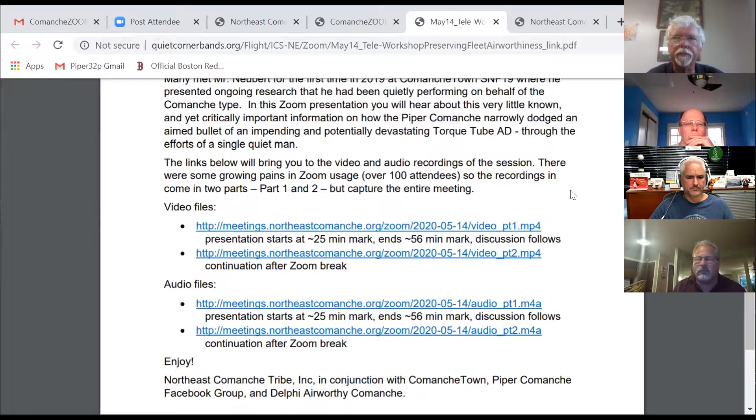Wow, that's impressive. Whoops, no, I just blew it away, didn't I? I'm sorry about that. Again, can you still see it? No, okay, I have to go back and share it, okay.

The idea here that Pete has so clearly put together is everything shows you from the Comanche Zoom on how to get to the audio and the video.

And as it turns out on that last one, there were 2 parts, so listen to part 1 before part 2. What happened is the recording got fragmented in the middle, so we just continued recording it, and the parts are named separately. Don't think that they are duplicates of each other. Part 1 comes first, followed by a shorter part 2. It was internet interruptus.

Looking ahead, aircraft insurance is next week with Lycoming. That was supposed to be this week, we thought, and we were able to move Steve up to fill his spot.

New life for old autopilot. He's going to talk about the original ones that were in the Comanches, the old style ones. Rob Leonard was with the FSDO here in Connecticut and is a wings guy.

And then here's the 3 on autopilots. These guys are coming back after having done a massive group thing back in the earlier time with the autopilots. Then part 43, maintenance, how to do it and how to log it. And speed mods, in case you want to do something short of putting a 325 horsepower engine into your 180.

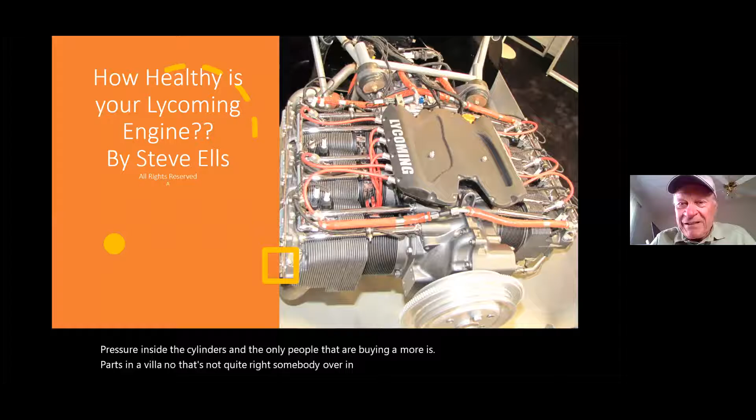So what you see in this picture is the Lycoming IE2 engine, which is a fully automatic engine waiting for somebody to buy it and put it on the airplane. It automatically adjusts the mixture, automatically adjusts the timing for best angle of pressure inside the cylinders, and the only people buying them is Partenavia. No, that's not quite right, somebody over in Europe. Anyway, this engine would be what we could all put in our airplane if there was no lead, because lead goofs up all the sensors in these engines. So someday we'll get there.

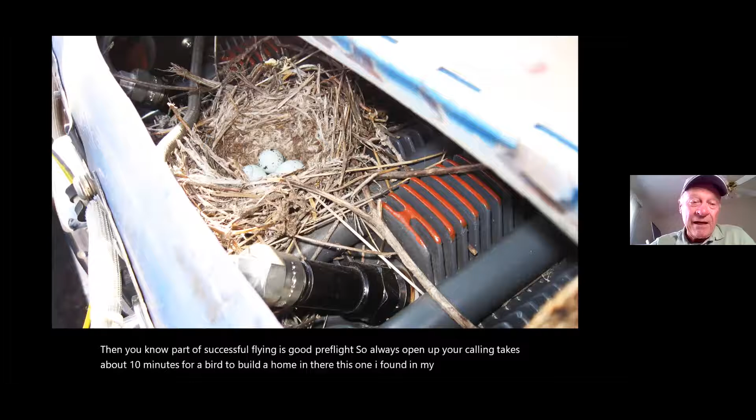Okay, this is what mechanics run into once in a while. Part of successful flying is good pre-flight, so always open up your cowling. It takes about 10 minutes for a bird to build a home in there. This one I found in the cowling of my 180 one day. I had an open hangar, so that made it easy for Mr. Bird to settle in and build a family.

This is a typical, this is the old exhaust I had on my airplane. I believe it was original, so it was 50 years old. You can see that it's been repaired before, sort of somebody stuck a gob of weld on it down here, and it cracked again. So this is the evidence that it's cracked.

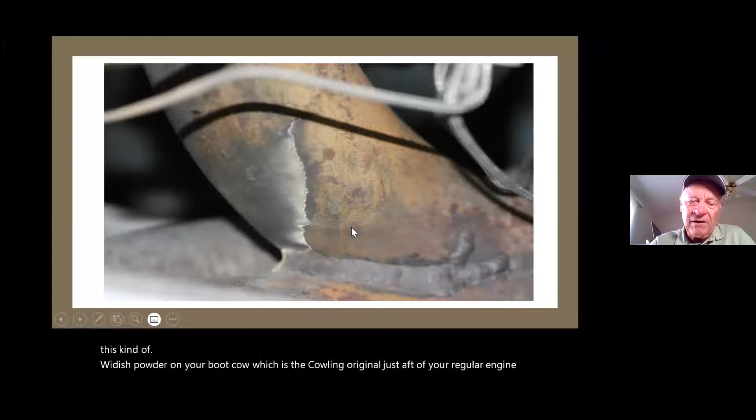You always want to be looking out for this kind of whitish powder on your boot cowl, the cowling just aft of your regular engine cowling, because it'll seep out there and it'll stain, and it's talking to you. So make sure you're listening.

Okay, how do we keep the engines healthy? Do what it takes to keep the CHTs under 400 degrees Fahrenheit. It's okay sometimes during an extended climb on a hot day to let it creep up above 400, but you should try to do your best to keep it under 400. The tools you can use are reduce your climb angle, reduce your power if able, or enrich the mixture. Sometimes you're not able to reduce power, you're climbing out, you've got a load, and you need all the rich you've got to keep the engine cool.

So sometimes it's going to go above 400, but if you have control of it, in cruise you should be much cooler than 400 most times. So that's number one.

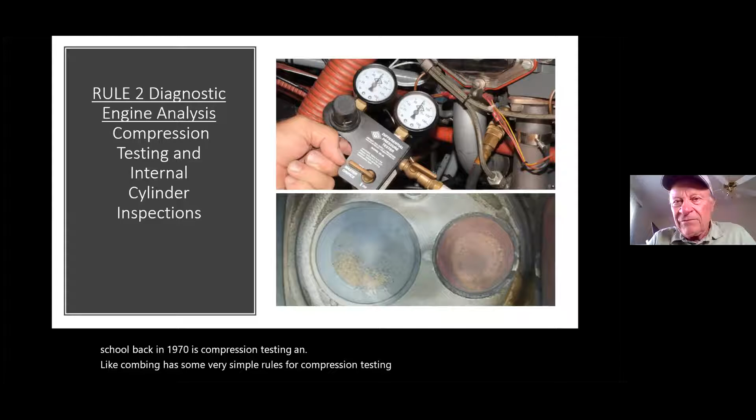During determining an engine's health, one of the major tools has been, since I went to A&P school back in 1970, compression testing. And Lycoming has some very simple rules for compression testing. They're sort of soft rules. We'll get to them in a minute. But you can see here, the compression tester I use, basically you put the cylinder top dead center with it hot, if able.

You put 80 pounds of air into the compression gauge, and then there's a little leak between the left side and the right side, so you're not putting full pressure into the cylinder. It's a calibrated leak. So the gauge on the right side will show you the health of the cylinder as far as compression goes. In this case, this guy's able to hold 78 PSI, which is a really good number.

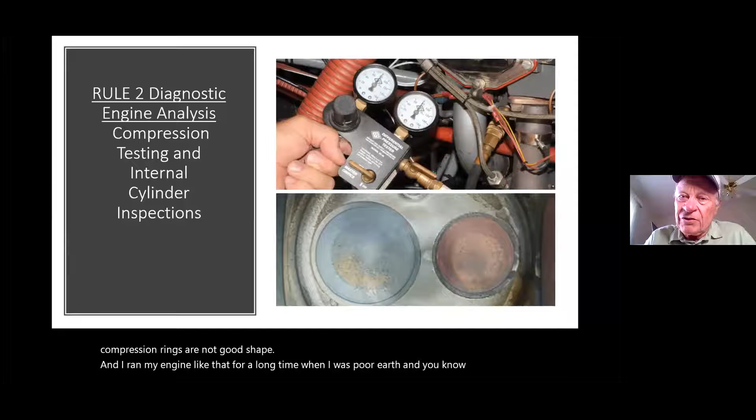There's some more to talk about here, because a high compression reading does not always indicate that the oil rings are sealing well. If, within 5 to 7 hours after you put nice clean oil in your engine, the oil's black as pitch, that means the compression rings are in not good shape. I ran my engine like that for a long time when I was poorer, and I just changed oil at shorter intervals, because what's getting down in there is contaminants and fuel, and that contaminates your oil. Some of the additive package in your oil is broken down when you get too much of those reactive components down in there. We'll talk about that some more in a minute.

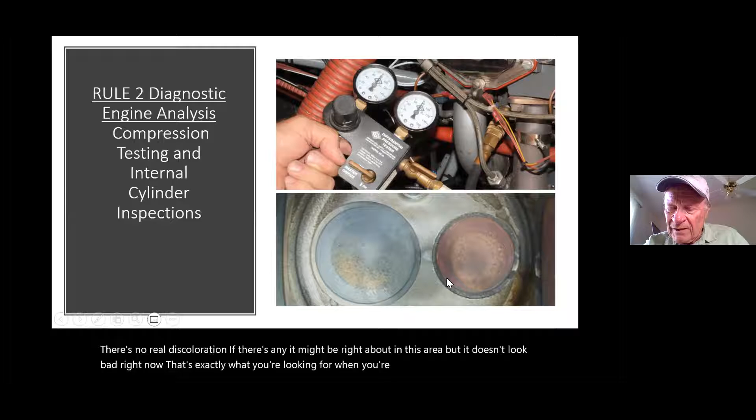You can see in the bottom picture the exhaust valve on the right, the intake valve on the left. I'm going to talk about a borescope in a minute, but the exhaust valve shows a very good pattern. You can see around the perimeter how the color is almost uniform, with no real discoloration. If there's any, it might be right about in this area, but it doesn't look bad right now. That's exactly what you're looking for when you're doing a borescope and looking into the cylinder. The critical valve is the exhaust valve, because that's the one in all the heat.

So here's what Lycoming says about compressions. It's service instruction SI 1191 alpha. They give a couple of soft rules: compressions should be within 5 psi of each other. A difference of 10 to 15 psi, investigate it, but don't take the cylinder off. Retest it in 15 hours.

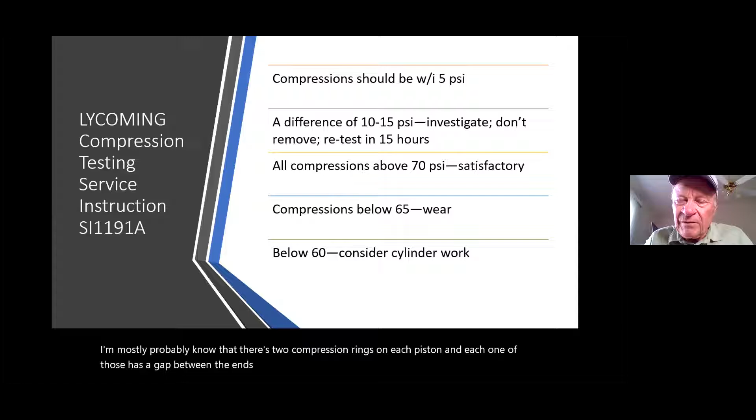Most of you probably know there are 2 compression rings on each piston, and each one has a gap between the ends because they move on the pistons a little bit, and that allows them to move. Occasionally these gaps between the 2 piston rings line up, and then your compression will go down a little bit. But the rings continue to rotate as long as the cylinder isn't contaminated with oil residue or carbon, or the pistons aren't either. That's why they say retest it, retest it. It's not going to hurt anything if there's a slight split.

They also say if compression is above 70, you're good to go. If compression is below 65, they claim there's wear, which should be obvious -- you get a high time engine, there should be wear. They don't say anything about pulling a cylinder at that point. Below 60, consider cylinder work, and that's a pretty soft admonition.

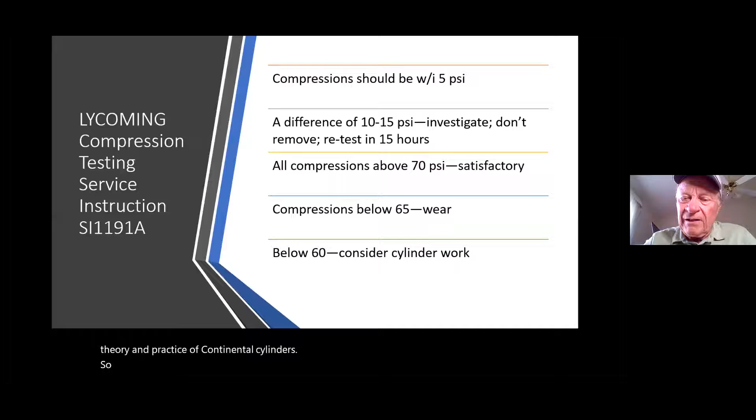Like I said, these cylinders hold compression really well. They're totally different from the theory and practice of Continental cylinders. Lycoming uses a nitride-hardened surface, which is really resistant to wear, so they don't wear out very much -- not nearly as much as a Continental, which is a whole different theory. So those are your guidelines, and they're pretty flexible guidelines. The old engine I had, which was a field overhaul from 1985, was still making good compression. It had some serious problems by the time I pulled it off, but it never quit making power. We'll talk about that in a little bit too.

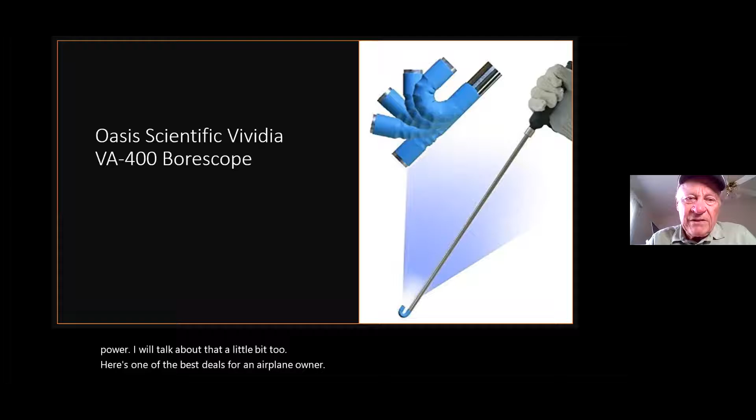Here's one of the best deals for an airplane owner: a borescope. This company called Oasis Scientific built this little Vividia VA-400 borescope. It's designed to go straight into a cylinder -- take out the spark plug, stick it in there. There's a little plunger on top of the handle, and you can bend the end around and rotate the handle to get a view of anything you want inside the cylinder. Then you can hook it up with a USB to your phone or tablet and take pictures. I take pictures every time I go inside the cylinders, and I can compare them later.

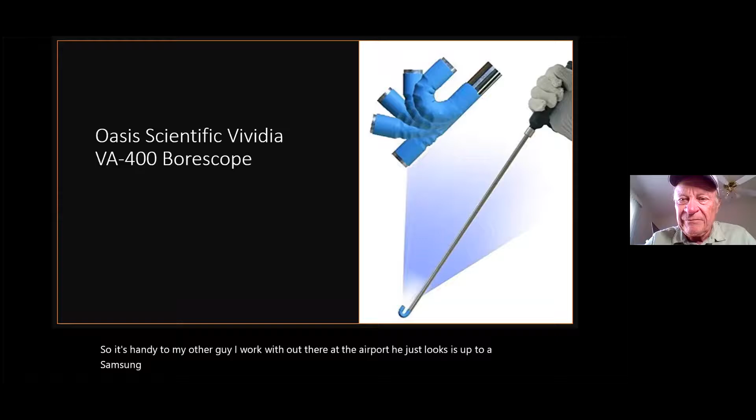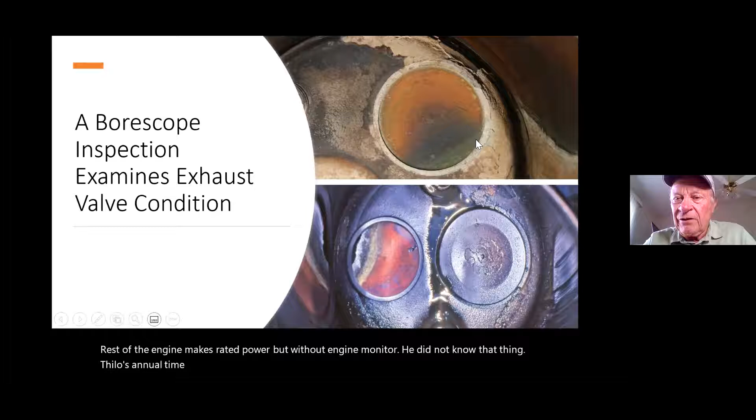The top one, you can see the discoloration right here, about 4 o'clock to 6 o'clock. That tells me, and will tell anybody that knows what they're looking for, that it's hot there compared to the rest of it, which means you're going to take that thing off and do whatever it takes to get it to seal well again. I mean, take the cylinder off. So the borescope really pays for itself right off the bat, I think.

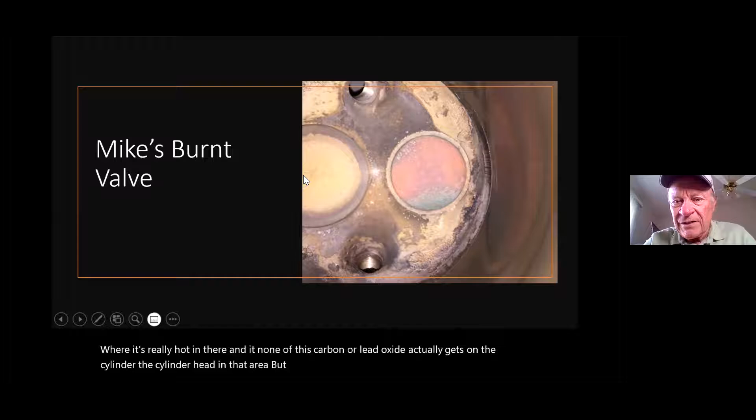This is another picture of a valve, exhaust valve that's getting hot. This is also off of Continental. You can see Continental angles one of the spark plugs. So you can see the burn pattern where it's really hot in there, and none of this carbon or lead oxide actually gets on the cylinder head in that area, but it's evident everywhere else. And that's another reason I'd love to get unleaded fuel, so we wouldn't have this contamination of the oil in the cylinder head, the piston, and the oil.

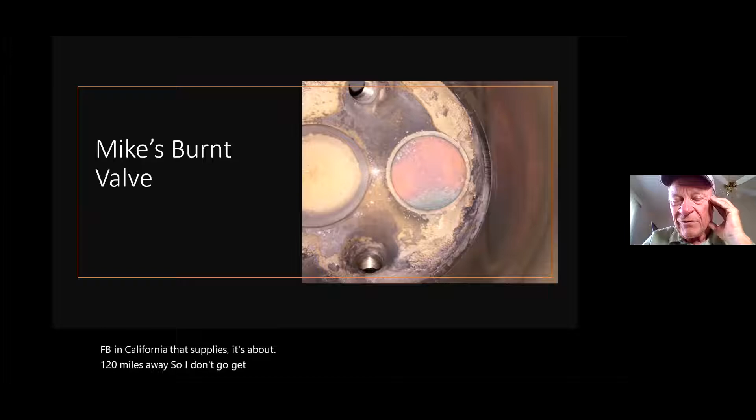But I've been talking to a couple of providers, and they say, oh, it's right around the corner, which is what I've been hearing for 22 years now. So I'm not actually holding my breath for unleaded fuel. If there is some unleaded fuel you can burn, it's Swift 94UL, and I burned it in my airplane. I did not notice any difference at all, but there's only one station, one FBO in California that supplies it. It's about 120 miles away, so I don't go get it up there. There are a few places in the Midwest you can get it, and they sell it cheaper than 100 low lead. So if you can burn it, if you find a place, I'd recommend it. Swift Fuels will list all the places that sell it.

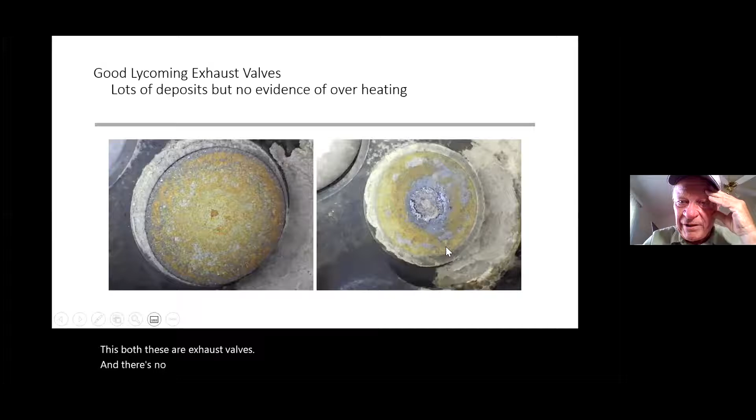This set is off of an O-320, and it's healthy. They have a lot of contamination on them, and this coloration is typical of 100 low lead. Both of these are exhaust valves, and there's no difference. There's no discoloration around the edges, which means the edges are sealing.

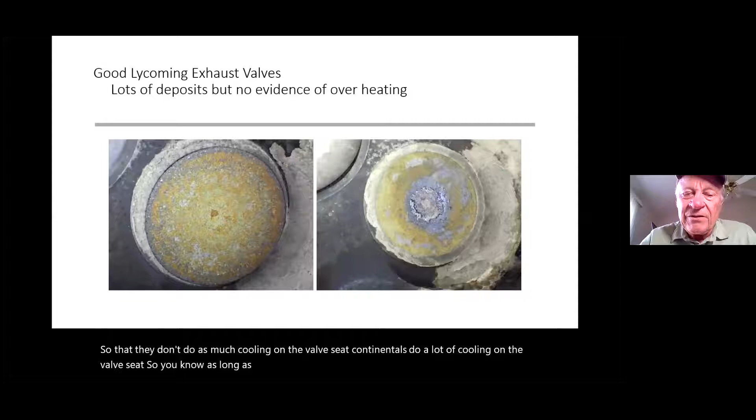Lycoming valves get rid of heat by... what the heck is up in those valve stems? I'm thinking now here. Liquid something or other, and in the valve stem, they convey the heat up the valve stem, and it radiates out through the valve guide. So they don't do as much cooling on the valve seat. The Continentals do a lot of cooling on the valve seat. So that's one reason there's an STC, or a bulletin, to ream the guides, to check the clearance on your valve guides, the valve stem to valve guide clearance, every 400 hours. And because of the extreme heat up there, the oil can create carbon in there and lessen the clearance between the valve stem and the valve guide.

So have any of you guys ever heard of morning sickness? That's where your engine starts, but all 4 cylinders or all 6 cylinders don't quite join the party.

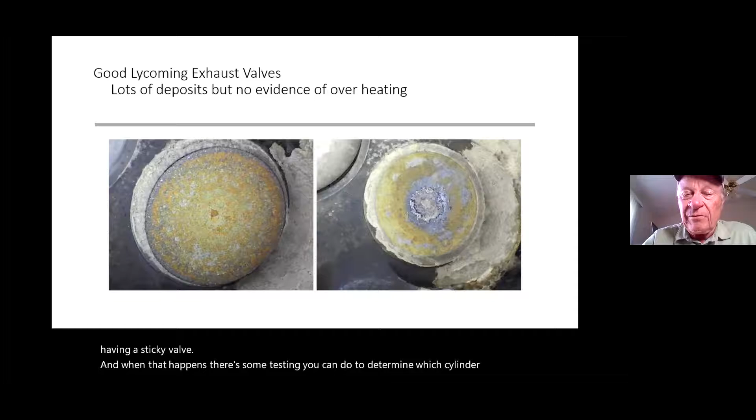One of them, and finally the thing starts up and running on all 4 or 6 cylinders. That's an indication you may be having a sticky valve. When that happens, there's some testing you can do to determine which cylinder it is, which guide it is. You should be able to tell which cylinder it is if you have an engine monitor for cylinder head temp reading.

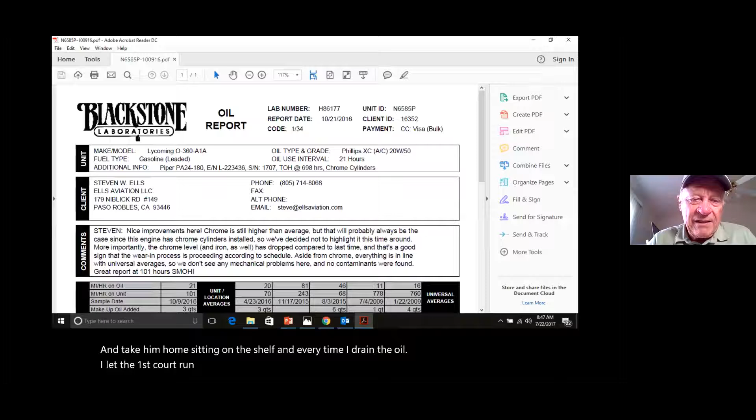Moving on, another tool I use is oil analysis. This is a company I like to use, called Blackstone Labs. Every year at Oshkosh—I guess I'm not going this year—but every year I typically buy a 6-pack of oil analysis kits, about 120 bucks, and take them home, sit them on the shelf. Every time I drain the oil, I let the first quart run out, then fill the little bottle, write down the details like the engine time, the type of oil, and whether I use an additive, then ship it to them. It's just standard mail, and within a week or two they mail back a little report like this.

You can see that if you go from left to right in those readouts below the white part, they keep a running total of the oil analyses, so you can compare how you're doing all the way along.

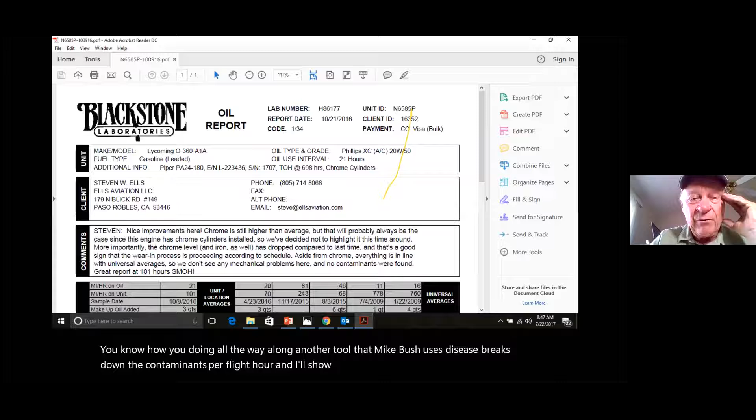Another tool that Mike Busch uses is he breaks down the contaminants per flight hour. I'll show you a little later how that works out for him. That's a good way to do it. He's a little more techie than I am, but that's what he does.

Another thing that's often missed during oil changes is this plug right here. This is on the bottom of your engine, the bottom of the oil pan at the back end, and that's the pickup strainer. It's a very rough tube with holes in it, meant to collect the big chunks. So if you really think you have an engine problem, that's where you want to go first, because if things are really falling apart inside that engine, they'll be right there.

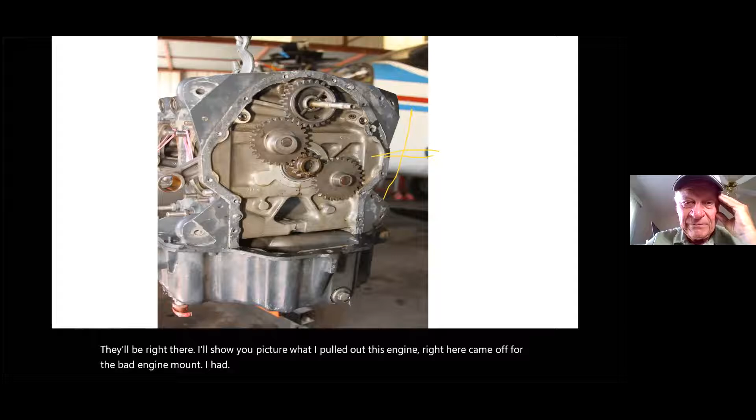I'll show you a picture of what I pulled out. This engine came off for the bad engine mount I had—no, actually this engine came off because we were doing a complete overhaul. You can see I took it apart, some disassembly on the hoist there.

This is the thing on the left there—that's the pickup screen, and those little black parts down there are what I found in the bottom of the engine when I took it apart. As I said, this engine was pretty tired by the time I got there.

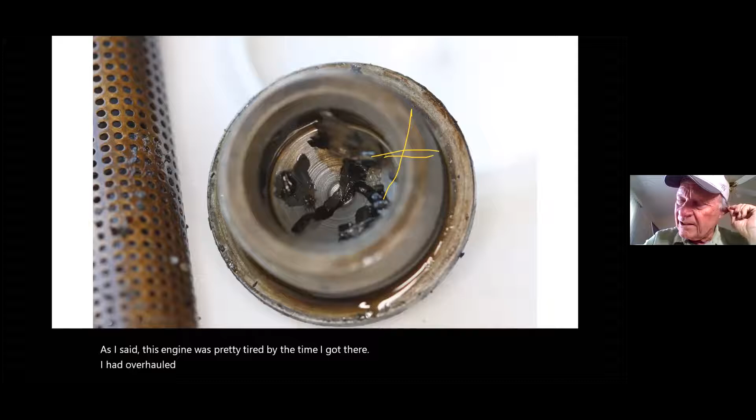I had overhauled the cylinders, knowing I had bad oil control rings, put them back on, and created a big oil leak I couldn't stop. So I had a friend with a machine shop, and we decided we could rebuild this engine—it's legal for an A&P to rebuild an engine. When we took it off and took it apart, I found it had a cracked main bearing journal, but bless its little heart, that tough engine kept on running.

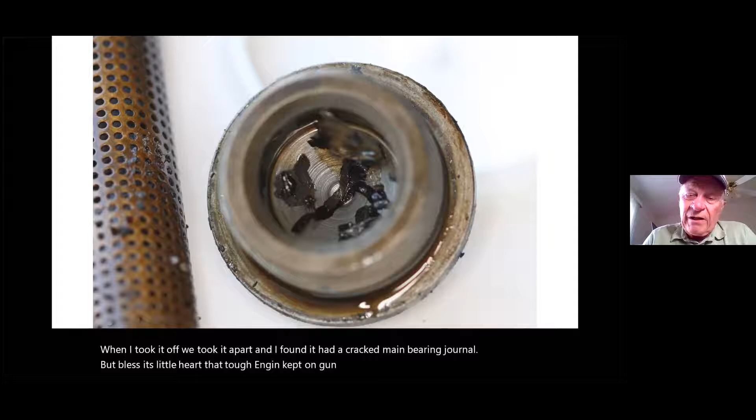It was ready for an overhaul. Like I said, I'm not sure of the competency of the people that built it in 1985—it was a field overhaul—but it kept running really well. I flew it all around and had some confidence in it. I've got much more confidence in this engine now.

If you have an oil filter, you always want to remove the can, cut the media off the can and the center tube, and inspect it. I cut it off using either an electric knife I bought at the Salvation Army or a hacksaw, saw that stuff off the center tube, and look it over really good with a flashlight. If I see any metal at all, I'll put a magnet on it to determine if it's ferrous or non-ferrous.

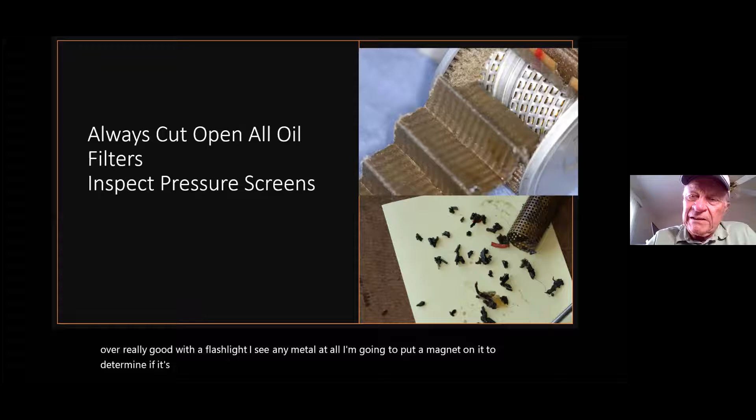Often, especially in higher time engines, you'll see little black carbon chunks. You can tell if they're carbon if you put your thumbnail on them and push down—they'll break apart. The lower picture shows some more of the schmutz I got out of that engine when I took it apart—a lot of carbon and what looks like seals. So you always want to inspect everything when you get a chance. That's the way to do the troubleshooting, to determine your engine's health.

Okay, that's the wrong one, go back one.

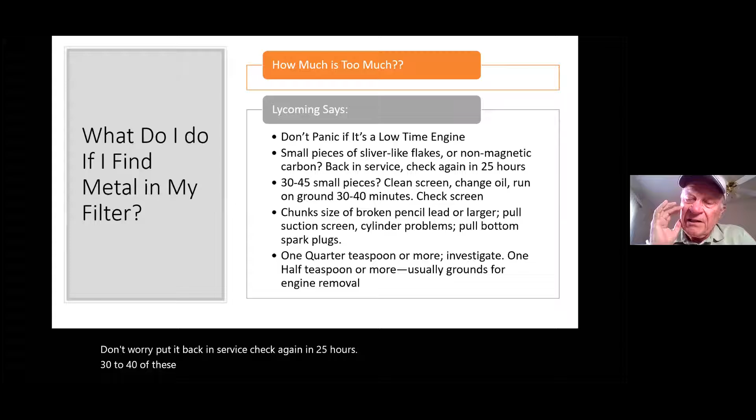What do you do if you find metal in your filter, and how much is too much? Lycoming says don't panic if it's a low time engine. All low time engines are wearing in or breaking in, and there will be some metal produced as it wears together, as all the parts start dancing together. They say if there's small pieces of sliver-like flakes or non-magnetic carbon, don't worry, put it back in service, check again in 25 hours. For 30 to 45 of these small pieces, clean the screen or filter, change the oil, run it on the ground for 30 to 40 minutes, and then check again. It'll tell you if something's coming apart.

Chunks the size of a broken pencil lead or larger, pull the suction screen, which is that screen at the bottom of the pan. Usually this indicates some kind of cylinder problem. They suggest you pull the bottom plugs, and you'll be able to determine which cylinder it is. Oftentimes when metal's bouncing around, it will smash one spark plug. The borescope also comes in handy there.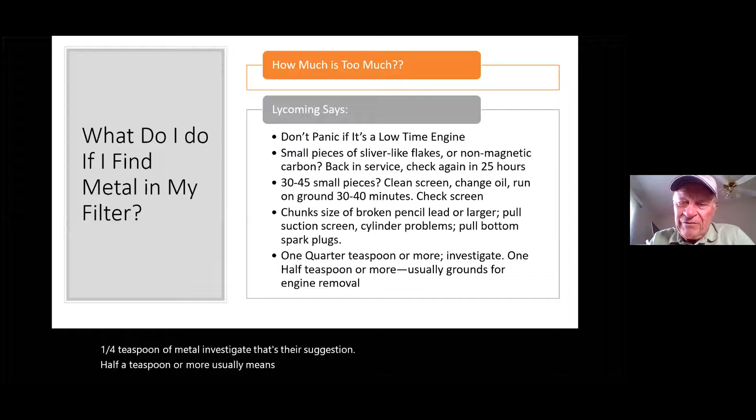A quarter teaspoon of metal, investigate - that's their suggestion. A half a teaspoon or more usually means the engine needs to be removed and disassembled. So there is some leeway there, it's not an either-or situation.

What's the maximum oil I can use and still be airworthy according to Lycoming? That's all in service instruction 1427C. There's a formula: 0.006 times the brake horsepower times 4, divided by 7.4, equals quarts per hour. So I did one example for my 180, we had 65% power, which is 117 horsepower. The formula works out to 0.379 quarts per hour maximum consumption, or a little less than 1 quart every 3 hours.

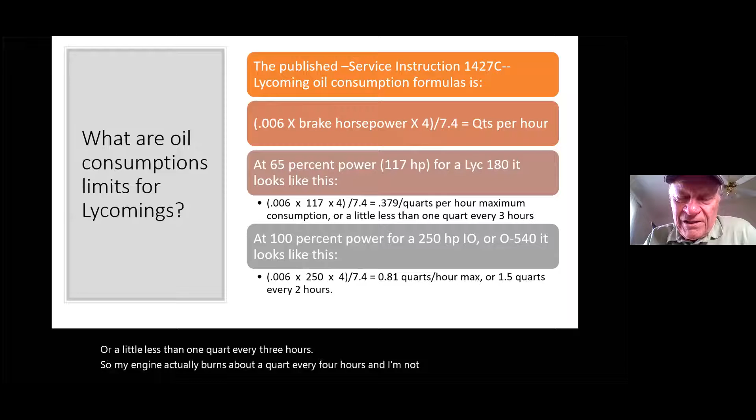So my engine actually burns about a quart every 4 hours, and I'm not worried about it at all because it's very stable. I also have chrome plated cylinders on my engine, and they typically are not, you're not able to dry them up as much as a steel cylinder.

So I did one with a 250 horsepower Lycoming. Let's say we're running at 100% power, which nobody runs at 100% power all the time because most of the time you can't, but just for example, run through that formula: 0.81 quarts per hour max, or 1.5 quarts every 2 hours. So you can run a lot of oil through your engine and still be airworthy.

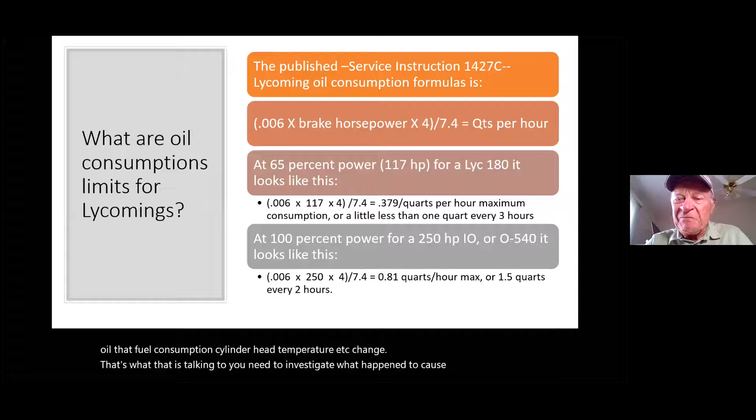The thing in every one of these pieces of information is when things change rapidly, or you notice a big change from one check to another, or a big change in the amount of oil, fuel consumption, cylinder head temperature, etc., that is talking to you. You need to investigate what happened to cause that change. Sometimes it's just you operating a little differently, flying a little higher, or using a different kind of oil, but any change is what you need to investigate.

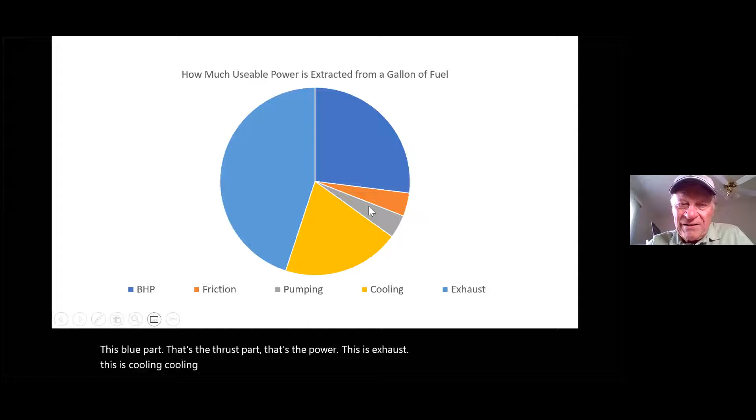So I don't know if you guys know it, but you only get about 27% of the energy in a gallon of gas turned into thrust in an airplane engine. This blue part, that's the thrust part, that's the power. This is exhaust, this is cooling losses, pumping losses, and friction. So how do we maximize that use of that fuel? We're going to take a look at what happens inside those cylinders as we lean the engine.

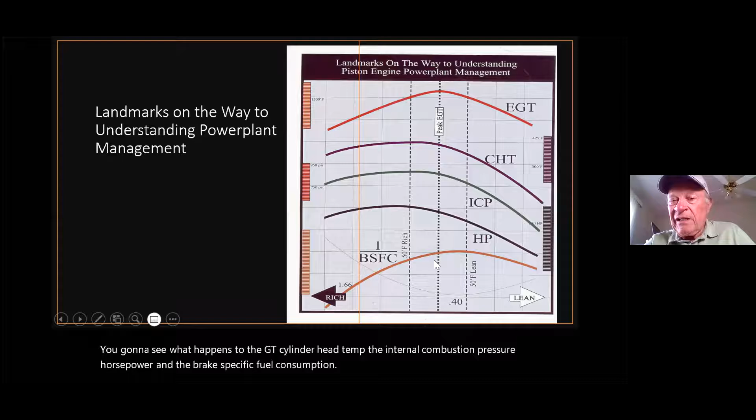This chart is from GAMI, General Aviation Modifications Incorporated, in Ada, Oklahoma. This is the rich side of the mixture, this is the lean side of the mixture. You're going to see what happens to the EGT, the cylinder head temp, the internal combustion pressure, horsepower, and the brake-specific fuel consumption as we lean the engine. Obviously, as we lean the engine, the EGT goes up and up and up until it hits peak. Peak is when the weight of the fuel and the weight of the air combine completely in combustion. That's the hottest the engine's ever going to get, or the combustion process is ever going to get.

As we do that, the cylinder head temp gradually rises and peaks out right about 50 degrees rich of peak. It starts to drop before you ever get to peak - the CHT does. Same thing with the internal combustion pressure, it's almost parallel with the CHT. It's maximized out right about here, which is usually about 80 degrees rich of peak.

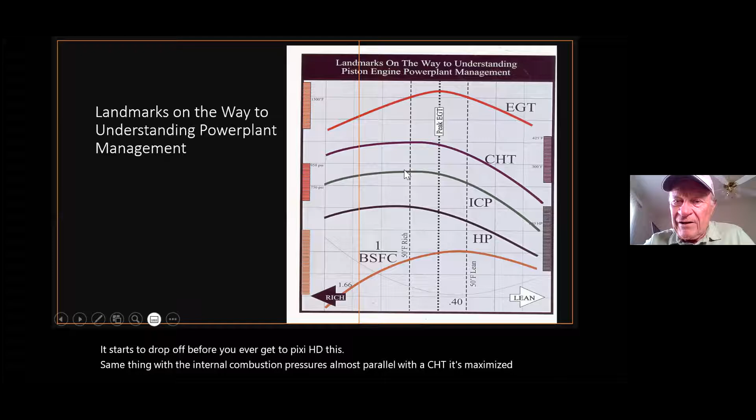Horsepower maxes out about 80 degrees rich of peak, you can see it here. So if you want to run your engine where you get the most power out of your gallon of gas, run it at 80 degrees rich of peak. That's not the most efficient, but it's where you get the most power out of each gallon.

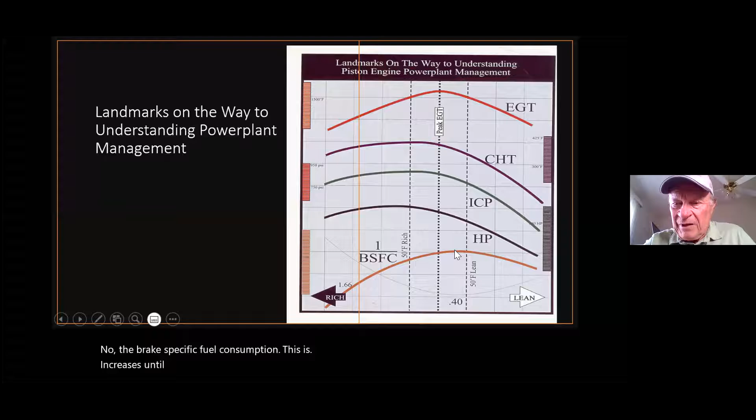Now, the brake-specific fuel consumption increases until you get lean of peak. So lean of peak, right in this area here, is where you get the best power per gallon of gas. You get good power per gallon of gas here, but it's not the best.

So anyway, these are all things that happen within your engine as you lean, just to get an understanding of what's going on.

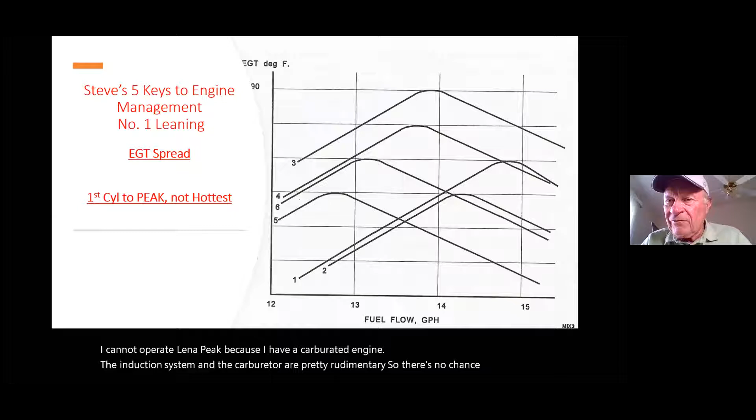Now, one thing not everybody understands about leaning is something called the EGT spread. There's been a lot of talk about lean of peak versus rich of peak operating. I cannot operate lean of peak because I have a carbureted engine. The induction system and the carburetor are pretty rudimentary, so there's no chance I'm going to get even fuel air mixtures to each cylinder. This creates what's called an EGT spread.

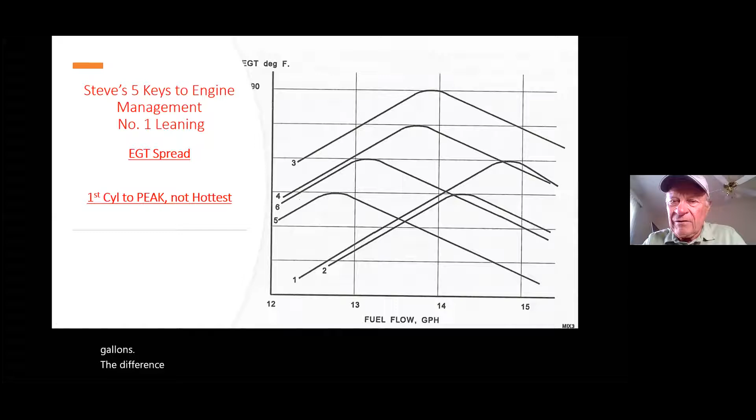If you look here, these are the leaning charts of 6 different cylinders, and the fuel flows. This guy over here, number 1, peaks out about 14 3/4 gallons. Number 4 peaks out about 13.5 gallons. Number 3 peaks out just under 14 gallons. The difference in gallons per hour between the first cylinder to peak and the last cylinder to peak is called the EGT spread.

And why is that important? Well, because you're not going to get them all to peak at the same time, and you're not going to get them all to hit 80 degrees rich of peak for best power at the same time. It's just, unfortunately, the development of these engines.

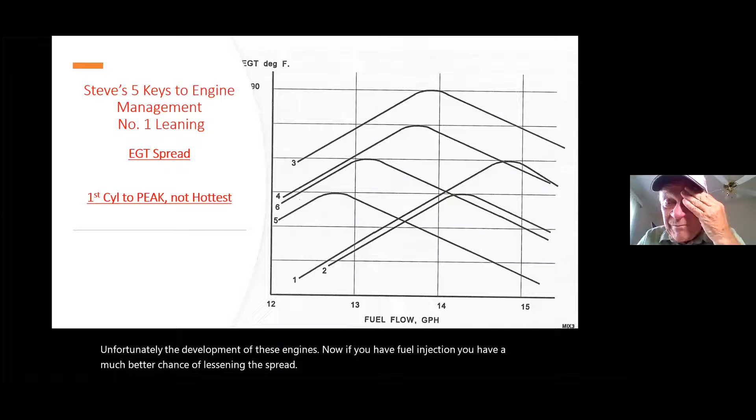Now, if you have fuel injection, you have a much better chance of lessening the spread. In fact, GAMI will sell you a set of matched fuel injectors, which do a lot to bring that EGT spread together. In fact, they'll have you do what they call a lean find test, and in that, they'll ask you to fly at 60% power.

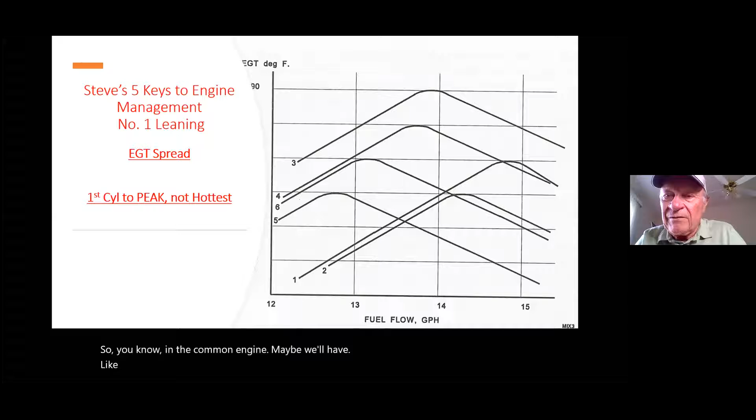You must have an engine monitor to make this work, and they'll ask you to write down what the fuel flow is as each cylinder peaks. So in the common engine, maybe you'll have like 0.7 of a gallon spread between the first and the last. Well, they'll tune up these injectors to adjust for that variance to get you down to where ideally you'd like to get down to 0.2 of a gallon spread.

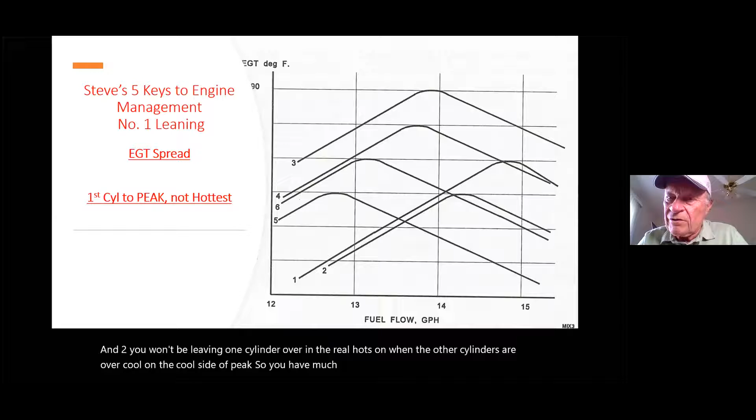When you get down to 0.2 of a gallon spread, you can easily operate lean of peak because, number 1, all the cylinders will be producing the same power, and number 2, you won't be leaving one cylinder over in the real hot zone when the other cylinders are over on the cool side of peak. So you have much better control of the temperature of the cylinders if you have fuel injection and those GAMI injectors. Now, why would anybody want to operate lean of peak?

Oh, well, I got one more chart here. Best power fuel air ratio, where it produces max power for a fixed mass of airflow, is always some mixture around 80 degrees rich of peak. Best economy fuel air ratio, which produces max power for a fixed mass of fuel flow, that's the green line here. That's best economy. This is best power.

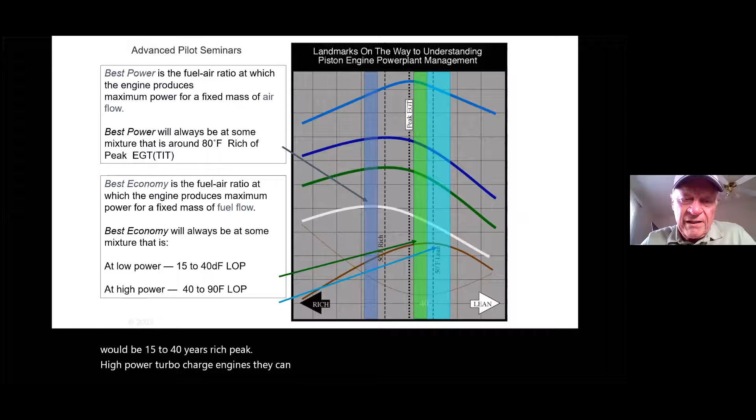And best economy depends on whether you're turbocharged or not, it varies. Low power, non-turbocharged, would be 15 to 40 degrees lean of peak. High power turbocharged engines can run at 40 to 90 degrees lean of peak.

So now, why would you care about such things? Why fly lean of peak? And I hate to bring this up because most of us aren't able to, I can't. Peak is what's called stoichiometric, chemically perfect combustion, 16 pounds of air to 1 pound of fuel. Best power, 75 to 100 degrees rich of peak, burns approximately 20% more fuel than peak, yields 3% more power, and 1.5% more true airspeed. That's where most of us fly.

Best economy, 40 to 70 degrees lean of peak, uses 20% less fuel than peak, 10% less power, so you sacrifice a little power but save a lot of fuel, and 5% less true airspeed. So the numbers work out if you can fly lean of peak. It's not going to go quite as fast, but there's other advantages too. Let's take a look at those.

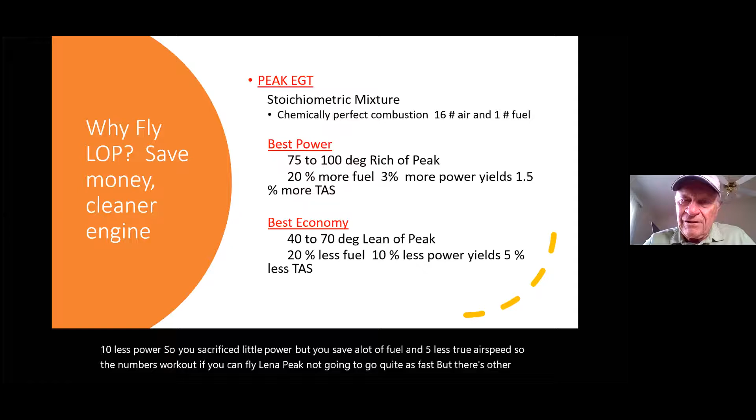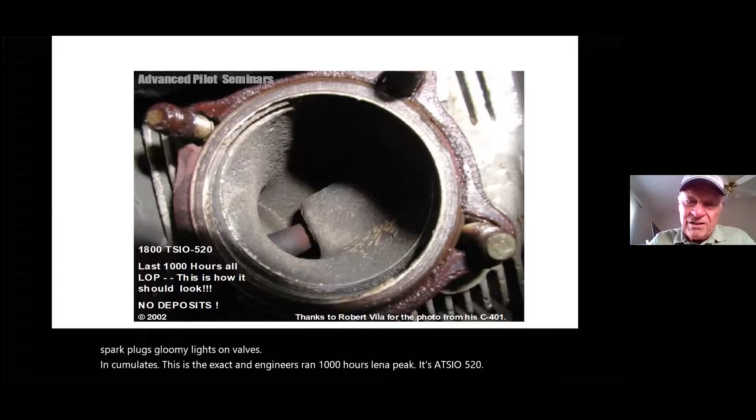Rich of peak, there's all kinds of contaminants, extra fuel, extra lead, extra crud that builds up inside your engine. And all that stuff takes a toll. It accumulates here, on the exhaust port, spark plugs, valves, pistons. This is an engine that's run 1,000 hours lean of peak. It's a TSIO 520. You notice any contamination there? If there is, it's very, very minor. Big difference. But again, in a perfect world we could all run lean of peak and gas would be $2 a gallon, but it's not that way today.

Next rule is we want correct ignition timing. Our magnetos are set to spark the spark plugs at one point in the engine rotation, one point before top dead center on the compression stroke.

I made this picture on the left. These are two ways to set the timing, two ways to determine the crankshaft location so you can make the mags fire at a certain point. You can see you've got that degree wheel on the front of the spinner, and then you can also use an inclinometer, as I put there on the prop. It's 25 degrees. You locate top dead center, then you back off from that.

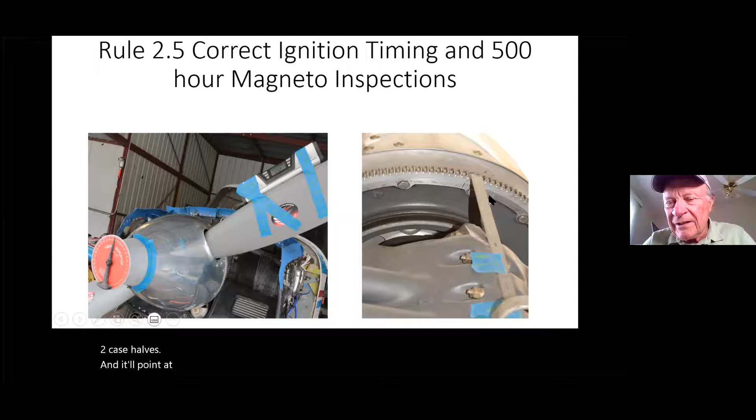That's the way they do it pretty much on Continental engines. They also have a timing mark, but not all of them still have that because Continental took it off. On Lycomings, you can take a straight edge, like this 12-inch ruler, put it right against the backbone of the two case halves, and it'll point at a mark on what many people call the flywheel that says 25 degrees. So if the flywheel is installed correctly, and it's pretty hard to install it any other way, that's the easy way to do it. There's also a little dot on the other side of the flywheel which matches up to a dot on the starter housing to time it. So getting the crankshaft in the proper position to time your mags is not difficult on a Lycoming.

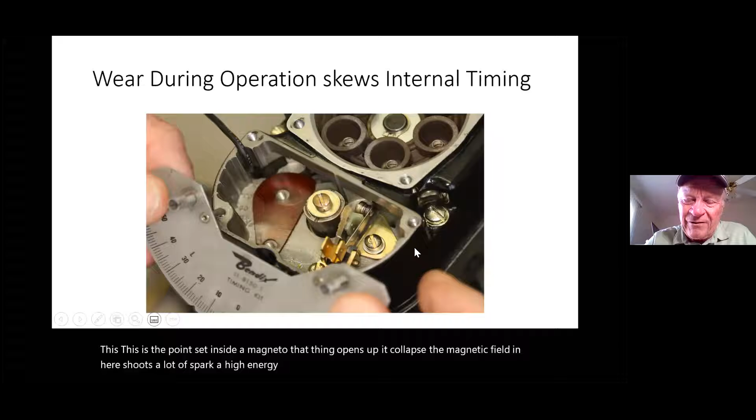Okay, let's talk about 500-hour magneto inspections. Why do we need to do that? Because magnetos wear. This is the point set inside a magneto. That thing opens up, collapses the magnetic field in here, shoots a lot of spark, a high energy spark out to these towers. There's also a distributor in here which distributes the spark in the proper place.

This little white plastic thing is a follower, that's what bears against the cam. That wears because this felt here has oil or lubricant in it, supposed to lubricate the interface between the cam and the follower. After 500 hours, it's worn. When it wears, what we call the internal timing of the magneto changes. So when the internal timing changes, the external timing, or the timing to the engine, changes. When the timing to the engine changes, you're no longer firing the plugs at the ideal time.

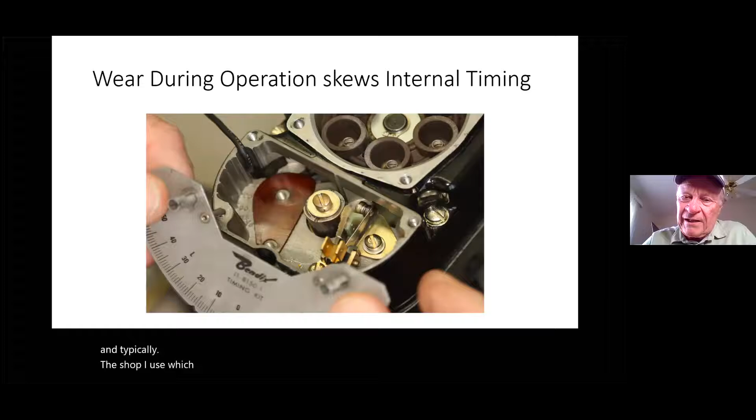So I highly recommend everybody pay attention to 500-hour magneto inspections. That's not an overhaul, that's a 500-hour inspection. Typically, the shop I use, which is up in Missoula, Montana, Aircraft Magnetos, they replace the parts that are needed. Also, if you need any magneto advice, the guy up there named Cliff is one of the smartest people I know as far as magnetos. So, Aircraft Magneto Service in Missoula. I've known him for over 40 years.

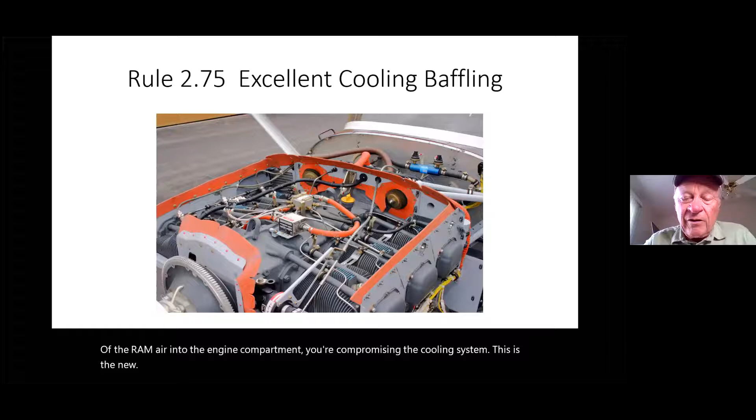He knows his stuff. Okay, next solution: make sure the baffling's in good shape. That's your cooling system. If there's leaks of the ram air into the engine compartment, you're compromising the cooling system. This is the new Lycoming engine on a 172. You can see that Cessna put a lot of energy into developing a very sophisticated, flexible baffling system.

If yours looks like it's been there 10, 15 years, sort of raggedy, that old black crap that may not seal too well, I'd recommend you call up McFarlane and get some of their baffle seal material. It's coated on one edge, so it will not abrade your cowling. The best stuff out there.

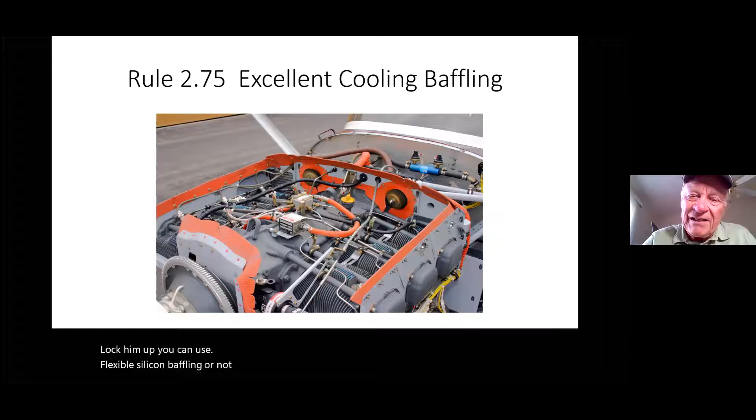There's a way to check the condition. Put your cowling on, stick a shop light, or any kind of light source, up through the outlet at the back of the engine into the accessory section. Then look through the cooling holes, the ram air cooling holes at the front of the engine, and see where there's light leaks. Plug them up. You can use flexible silicone sealant, buy it at any hardware store, or you can actually just restore all the baffle seals. It'll make a big difference. I haven't verified this, but somebody told me a 1 square inch leak of the baffling will compromise the cooling efficiency about 10%. I haven't verified that, but I heard that a while back.

I recommend you install an engine monitor.

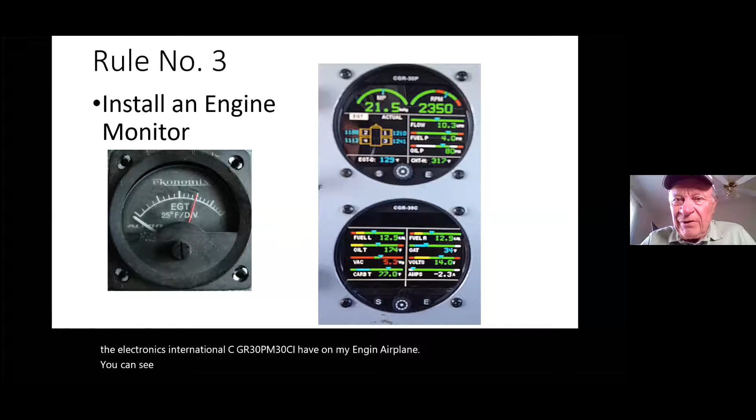Nowadays we don't have to do that anymore. We have sophisticated engine monitors. This is the Electronics International CGR 30P and 30C I have in my airplane. You can see RPM, manifold pressure, fuel flow, fuel pressure, oil pressure. The bottom gauge has fuel left, fuel right, oil temperature, outside air temperature, vacuum, volts, carb temp, and amps.

This window right below the manifold pressure is showing the EGT situation. I can push this button and select any number of displays. I can select rolling EGT and CHTs, where it rolls through the CHT and EGT for each cylinder in succession. I can also normalize a bar graph, where I put every EGT and every CHT, normalizing it so they're all the same level. So if there's any diversion, that's telling you a story.

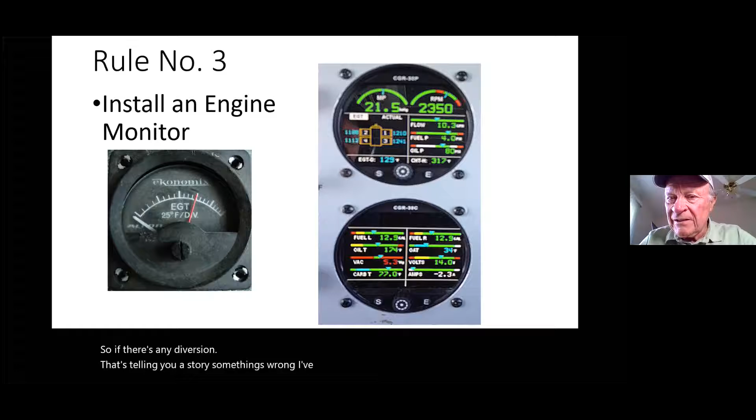Something's wrong - I've diverted from normal. There are also a number of audio warnings you can build into this and wire into your audio panel, so you don't have to keep your eyes on it all the time. You also have the capability, through a portable thumb drive, to download all the data.

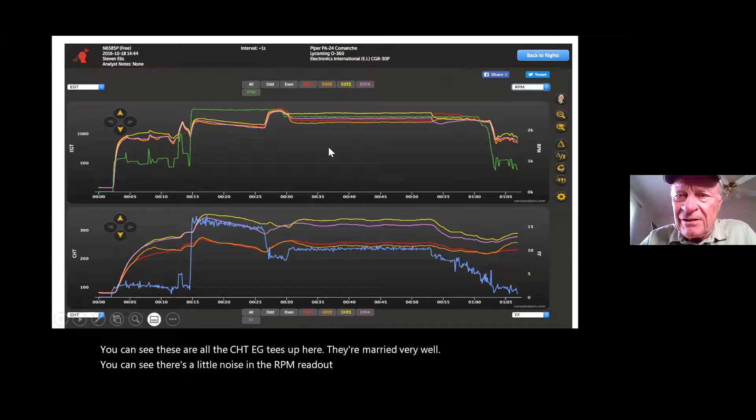This is from a flight I took in 2016. The green arc is RPM. You can see this is obviously takeoff, climbing, and then pulling the RPM back to cruise. You can see these are all the EGTs up here - they're married very well. You can see there's a little noise in the RPM readout, but that's just a connection problem.

Down the bottom here we have the CHTs, and you notice the big split between these CHTs - that's common in a Lycoming. Cylinders 1 and 2 are lower than 3 and 4, and the blue line is the fuel flow.

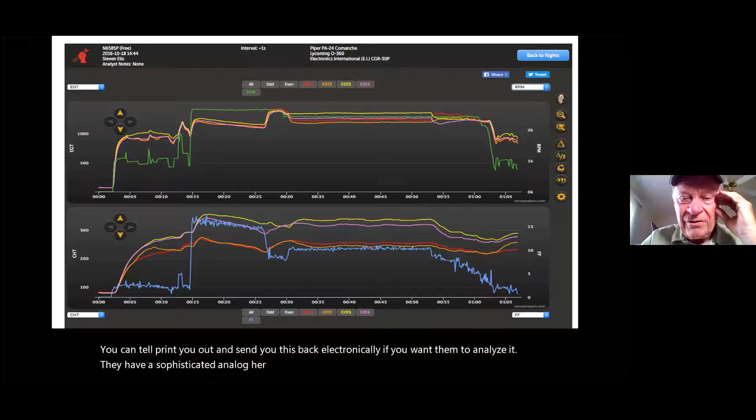In this program, this is a readout I got from Savvy Analysis. If you want to download your data onto that website, it's free - they'll print it out and send it back to you electronically. If you want them to analyze it, they have a sophisticated algorithm which can tell you if they see anything abnormal, and that'll help you. That's another way to gather information on the health of your engine. So there's lots of tools out there.

How often should you change your oil and filter? The manufacturer's recommended oil change intervals are every 3 months, or every 25 hours if you have a screen, or every 50 hours if you have a full flow oil filter, whichever comes first. Most experts recommend 25 to 35 hour changes if you don't reach the 3 months in that period. Typically this is because the additive package in the oils breaks down - the oil itself doesn't break down, but all the little additives that prevent wear and foaming and other negative things break down. So you can't run it 50 hours.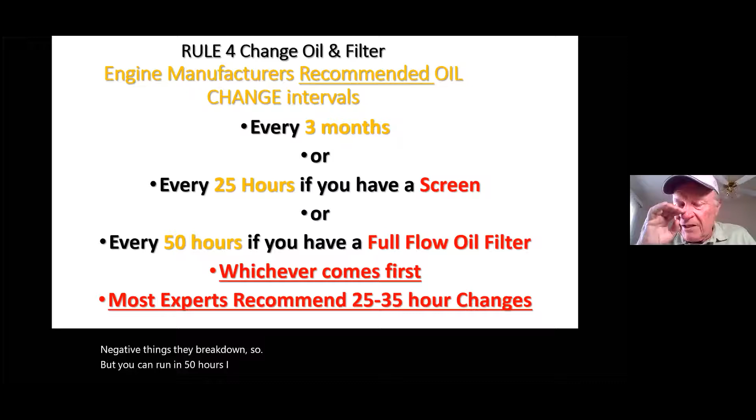I interviewed a company that flew checks in 210s, and they never changed the oil before 50 hours. They ran their engines right out to TBO every year, but they were flying 4 and 5 hours a night.

And like I said, cut the can open and look for crud. You can see a little bit of carbon in here, a little bit of aluminum. So what's in your oil?

I'm sort of a loner. I'm not used to talking so much.

Every oil has a base stock, which is about 90%, plus or minus, mineral oil. Some of them have synthetic. Some oils are synthetic, or a blend of mineral oil and synthetic.

They all have a dispersant, which keeps the oil clean by suspending the deposit precursors. In other words, this oil is designed so anything that drops out of the engine, contaminants like carbon or whatever, will be held in suspension in the oil so it can be carried to the filter.

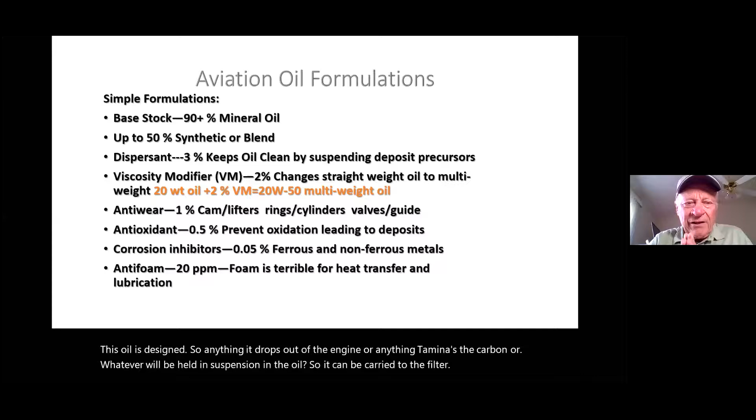They don't all have a viscosity modifier, but multigrade oil does. Multigrade oil typically is 20 weight oil plus 2% of this viscosity modifier, which equals 20-50 multigrade oil.

They all have a little anti-wear additive, a little antioxidant additive, corrosion inhibitors, and anti-foam additive.

Years ago, Lycoming built some engines that had some serious problems. They didn't last very long. They're the H2AD, O-320 H2AD. It was a new design and wasn't ready for prime time when they put them in 172s and sent them out to the world in 1977.

So they had to come up with a fix. Three ADs were issued. One of them, AD 0403 revision 2, required a pint of this high pressure lubricant to be added over the oil change. There's a can of it right there. It's very expensive if you buy it that way.

The oil vendors, who never missed a trick, realized this high pressure lubricant would help their oil, so they started adding it to their oil. So you don't have to buy it in the pint jar—you can use any of these oils here if you need it as required by the AD.

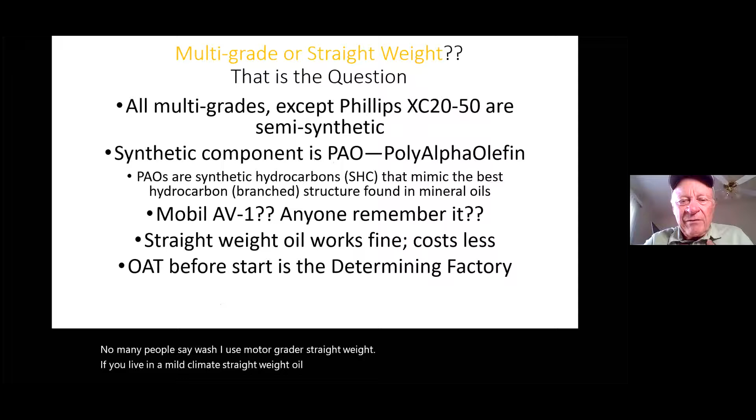Many people ask, should I use multigrade or straight weight? If you live in a mild climate, straight weight oil does fine. Mike Busch has used straight Aeroshell 50 and has gone way beyond TBO in his engines.

I use Phillips XC multigrade. It is not a semi-synthetic, it does not have any synthetic component. I'll tell you why I chose that. The synthetic component they add to oils is something called polyalphaolefin, a synthetic hydrocarbon which mimics the best hydrocarbon.

But does anybody remember the big kerfuffle with Mobil AV1 oil? In 1980, Mobil came out and said, we've got this oil, you can go 200 hours without changing it, lubricates better than anything. Well, before long, engines were having serious problems.

What happened was this old AV1 does a great job of lubricating, but it does a terrible job of scavenging the lead in these engines, a byproduct of combustion. It never held it in suspension so it could be caught by the filter. So what happened was the oil galleys—the little tubes throughout the engine that spread the oil around—would get clogged up, and they had main bearing distress because of oil starvation. Big stink.

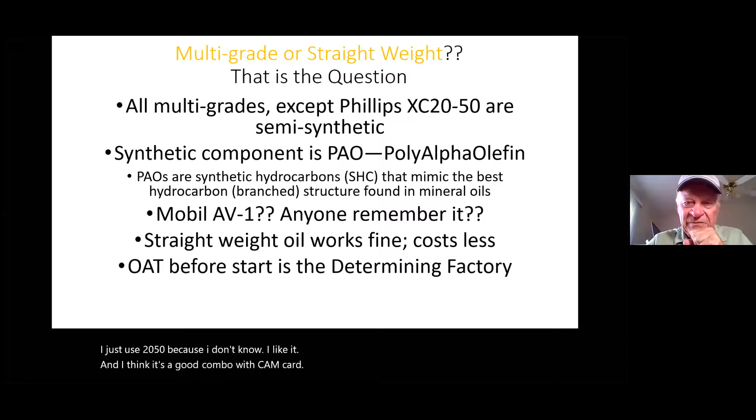If we're talking theory, the best way to run your engine is high manifold pressure and low RPM. If I had a turbocharged airplane, I'd be running about 28 inches of manifold pressure, and whatever RPM worked out to be the power setting I wanted to fly at.

Most of us can't run that way. Every time I climb to the most efficient altitude for my airplane, which is 7,000 to 9,000 feet, I can't get a high manifold pressure. So this is sort of theory unless you have a turbocharger. I'll show you why it works though.

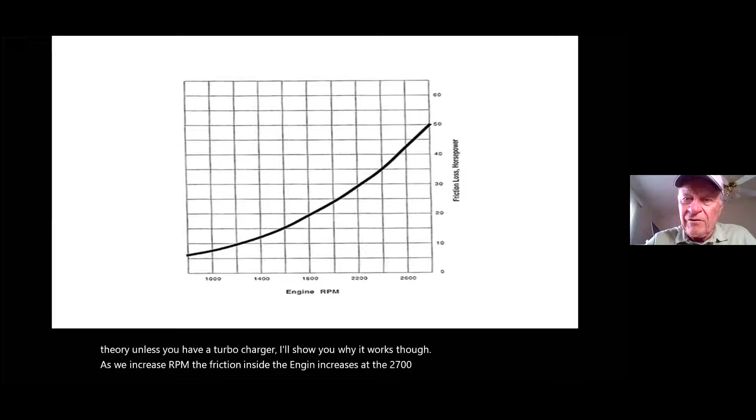As we increase RPM, the friction inside the engine increases. At 2,700 RPM, you've got almost 50 horsepower friction loss. So there's an advantage to lowering the RPM. You can lower that by about 22 horsepower just by getting down around 2,200 RPM.

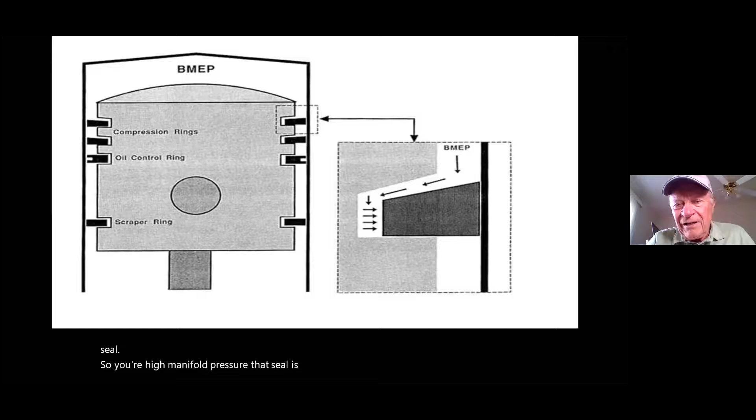The rings on each piston are designed to push out to allow the pressure of combustion—the brake mean effective pressure—to get down behind the ring and push out against the cylinder wall to seal. So if you've got high manifold pressure, that seal is more efficient, and with low RPM you've got less friction loss. So there are real advantages to doing it if you can. I can't do it.

So Mike Busch, you guys all know who he is. I've known him for, I don't know, 25 years. And he says these engines are hard to wear out. If they don't make it the distance, it won't be because I wore them out. It'll be because I allowed them to corrode internally because I wasn't flying often or regularly enough.

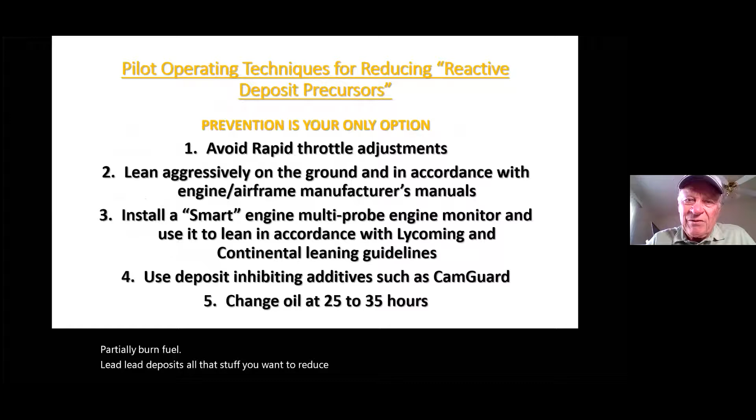The things that are reactive deposit precursors, those are the bad news made during combustion. Partially burned fuel, lead deposits, all that stuff. You want to reduce that as much as possible, and the only way you can reduce it is prevent it.

So here's the ways you do it, the 5 ways you can do it. Avoid any rapid throttle adjustments unless absolutely necessary. Easy does it. Lean aggressively on the ground. Install a smart engine multiprobe monitor and use it to lean in accordance with the guidelines.

Use a deposit inhibiting additive such as CamGuard, which is the only one I endorse. I know AvBlend is not something that I would spend a dime on. Change your oil every 25 to 35 hours. Changing oil removes all the bad juju and allows your engine to work clean.

Excuse me. CamGuard is separate from oil. It's not added to any oil. You buy it separate. It's not cheap. It's about $21 a pint, but it's a great protector.

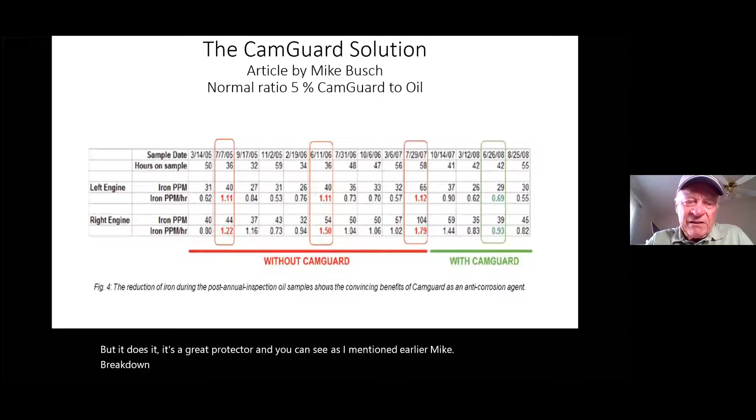As I mentioned earlier, Mike will break down the oil analysis readings into parts per flight hour. So you can see as we move from left to right, the 7705 reading is 1.11 parts of iron per flight hour. The right engine has 1.22. Move to the 61106, and these numbers are still above 1. Move over to the next one outlined in red, that's 72907.

They're still above 1. Now, one thing that will cause your iron readings to be high in oil analysis is inactivity, because any rust on the cylinder walls will show up as iron or ferrous metal. So then he added CamGuard, and 3 oil changes later, look what's happened to the iron parts per million per hour, dropped considerably. That's just evidence it works. There's another graph which I did not include, but this stuff works.

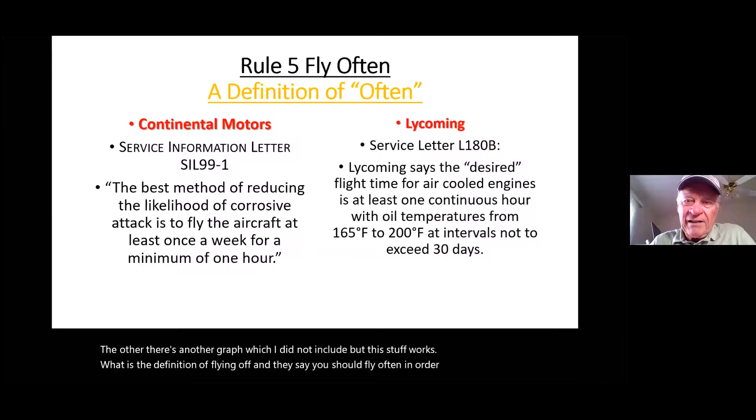So what is the definition of flying often? They say you should fly often in order to keep your engine running. Well, Lycoming has a service letter, and Lycoming, as I said, just like in the compression readings, these are sort of soft suggestions. It says desired flight time for air-cooled engines is at least 1 continuous hour with oil temperatures from 165 to 200 at intervals not to exceed 30 days.

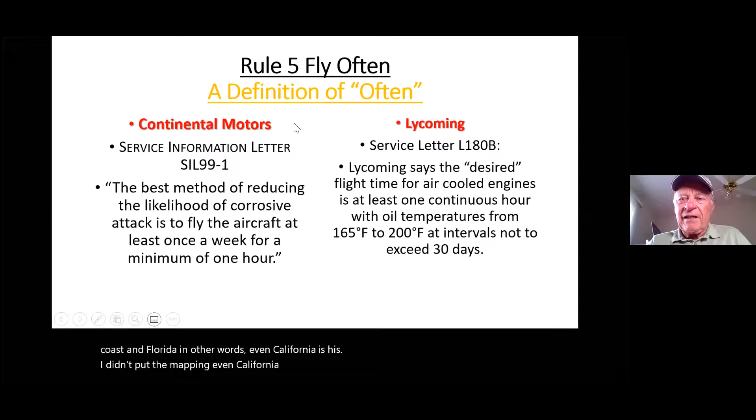That's pretty liberal as far as I'm concerned, especially if you live near the ocean, on the Gulf Coast, in Florida. Even California is regarded as a high corrosion area by the engine manufacturers.

So I've got a little list of places you can learn more. YouTube videos: Mike Busch has Leaning Basics and Leaning the Advanced. Ed Kollin, the guy that developed CamGuard, has a number of YouTube videos. One on how to minimize problems, one on how to overhaul. He also has one about making TBO, and the subject is blow-by, minimizing problems with oil life and others.

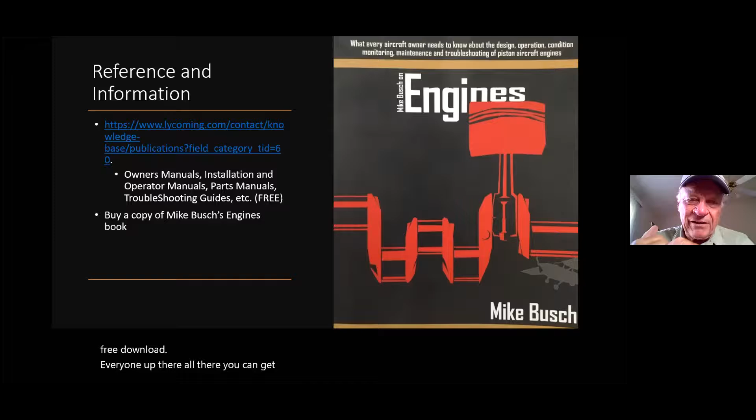There's also one more reference material. Every manual that Lycoming prints is available for free download. Every one of them, they're all there. You can get the engine installation manual, engine operation manual. You can get a parts manual. You can get a service manual. They're all there free at that website.

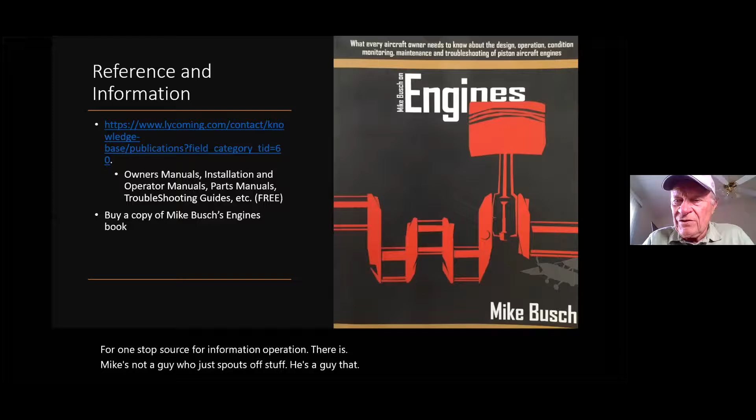I also recommend everybody buy a copy of Mike Busch's Engines book. It's about 25 bucks, but I've reviewed it. I've given it to a couple other very knowledgeable mechanics, and they all think it's the best one-stop source for engine information and operation there is. And Mike's not a guy who just spouts off stuff. He's a guy that supports his views with research and interviews with experts. Very good book.

So that's the start. That's pretty much how far I've gotten in this presentation. So I guess we can ask questions at this point.